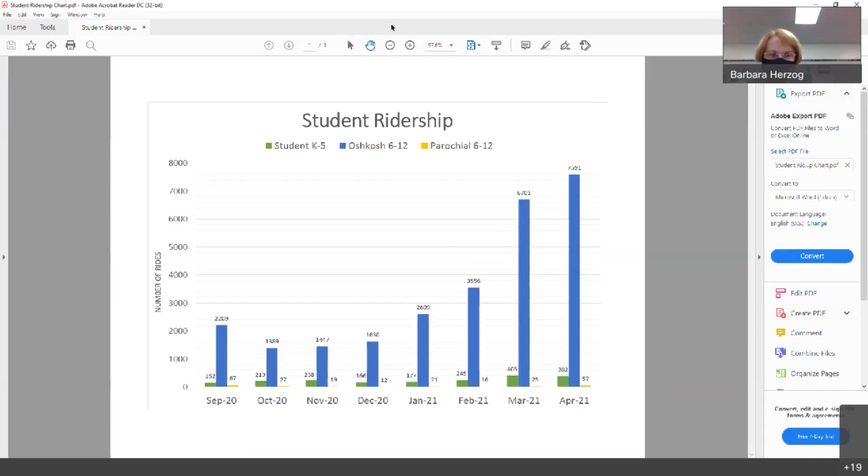I know our board committed to a third year because of the slowness in getting this off the ground. That's something the city had proposed, and because that first year was funded with private donor money, nobody really got their bang for the buck to start out this year. So we're using some of the CARES Act money to fill that gap for the first year and extend it for a third year. It seems like a pretty good compromise, and hopefully in the fall things will be back to normal, and we can see how it goes for the next school year.

Right, and even summer school might be a good assessment. For me, this fits in very nicely with our equity goal for the school district.

Dr. Cartwright and I felt that because this was almost a lost year in terms of taking advantage of this program, going to the third year made much more sense. I've had discussions with representatives at the Boys and Girls Club, and they're very excited about the fact, as Dr. Herzog pointed out, that the youth of our community will be able to access facilities like the Boys and Girls Club, the public library, summer school, anything they want to do. I think we're really going to see, as we get into the next school year, the potential for this program.

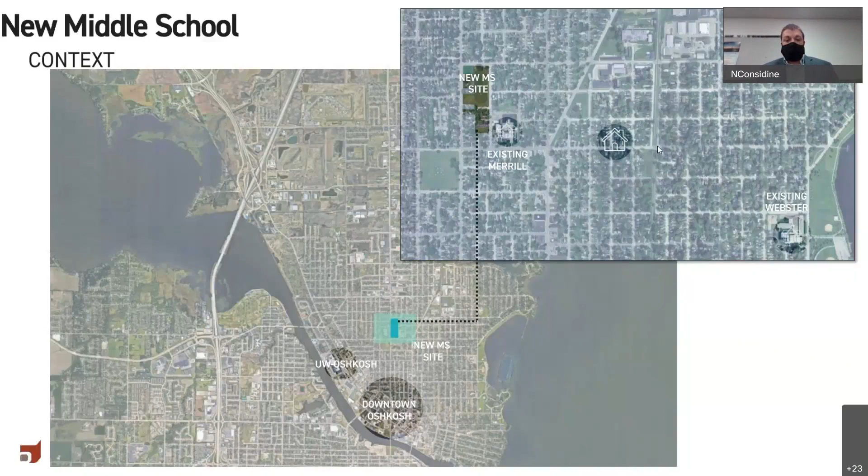We'll zoom in a bit further to our existing site. In the right-hand corner, where you see a couple of soccer fields outlined, is the current Merrill facility location. It's important that we're aware of the community's respect for that building. We talked to a teacher on the second floor about a month ago whose dad actually taught in that same building, not even the same room but the same building. So we're aware of the importance of that facility to this area.

We're cognizant of some challenges but also opportunities with the new site. It's a bit longer, and we have a couple of notches with residents we need to be aware of, whether they're within 30 feet of our building or across the street. Combining two middle schools into one is a big impact not only for the north side but for surrounding neighborhoods, so our building needs to fit in and be appropriate to the surrounding context. We're also cognizant of Jackson Street being adjacent, and the district has had the opportunity to purchase additional parcels to enhance the opportunity for this building.

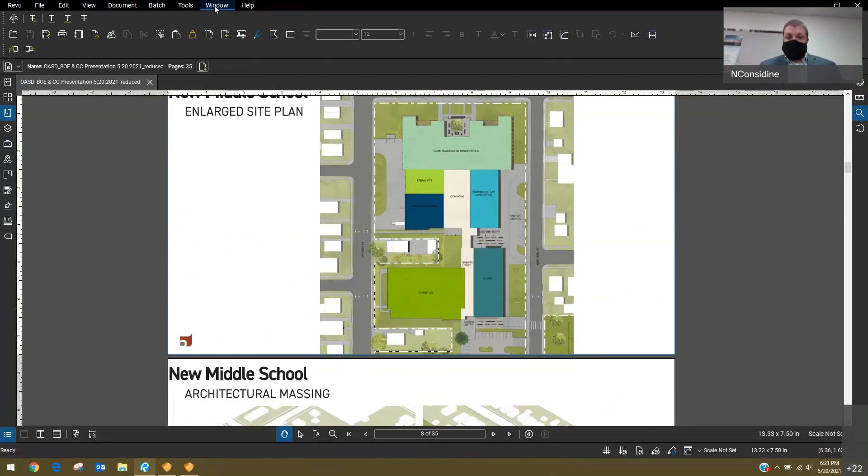Continuing on with the floor plan, you'll see the light blue bar in the middle is the admin and main office portion. The light blue admin portion is obviously adjacent to the secure entry.

Similar to the rest of the referendum, it was very important to make sure that the secure entry would allow for visitor parking, some visitor loop in the front, and making sure that we have a safety and secure entry so that this building can stand for another 100 years.

I'll go down to the bottom right where we're looking at a music option down in this lower corner, and then across from it, athletics. And really spinning everything together, you'll see in this beige area, it connects the secure entry in the middle. There's a common/cafeteria between the main office and the building support piece.

And then as you go to the south, we think that there's an opportunity for a great events lobby. So if you can imagine, you'll see event entry down at the bottom, any after school activities, weekend activities, really more of a public side of the building where we'll show you a 3-station gym, a fitness center, opportunities for music practices on the summers or on the weekends. Really, that entire south portion of the building, although informed shape-wise on the site, really has turned into the public side of the building. So we're very excited about what that offers for this site.

Continuing on, we'll look at an architectural massing. So if we start on the left, Jackson Street is kind of right where the mouse is pointed right there. And so, again, going back to the site context and being appropriate to our neighbors, being appropriate to the streets and the setbacks that we are asked to follow.

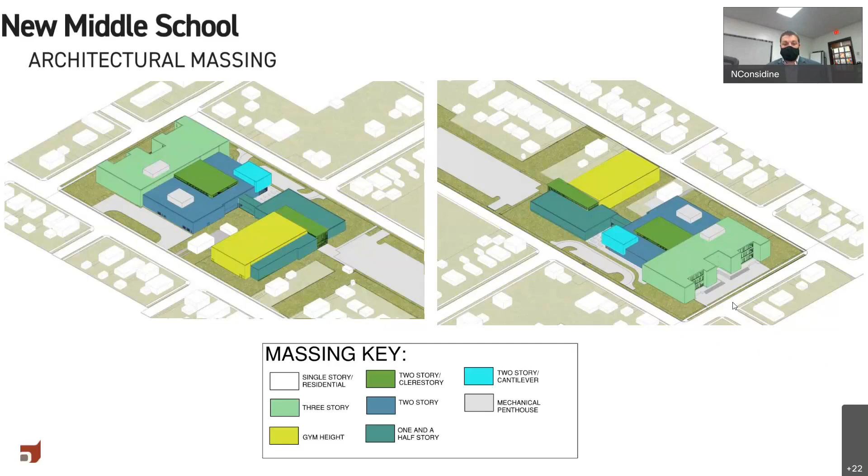On the first floor, again, the top area is mostly just classroom areas and support features for those classrooms.

As we combine two middle schools together, there's been a lot of concerns about how do we keep a big building feeling small. One of the best ways to do that is really creating two pods or two smaller neighborhoods that can be divided by something but yet unite in the middle. If we look on the left side, there's roughly 6 classrooms, and on the opposite side, there's another 6 with science in the middle. Science is kind of the bridge between those classroom areas. Down below, we have bathrooms, teacher prep areas, small group instruction rooms, elevators, things like that.

As we move slightly further down, maybe I'll start on the right side. The light blue area adjacent to the secure entry is the main office and a community room towards the top of the building, or top of that blue bar per se.

In the middle is a commons with a featured staircase that you'll see a little bit later on in the presentation. In this common/cafeteria area, not only is the staircase a feature, but you also start to see this box at the top, and that's a platform or stage of sorts. That could be featured in a lot of different ways, whether there's a jazz band, whether there's a small ensemble doing something, there could be small presentations for staff. There's a lot of opportunities that could be both within the school and also public use for that area.

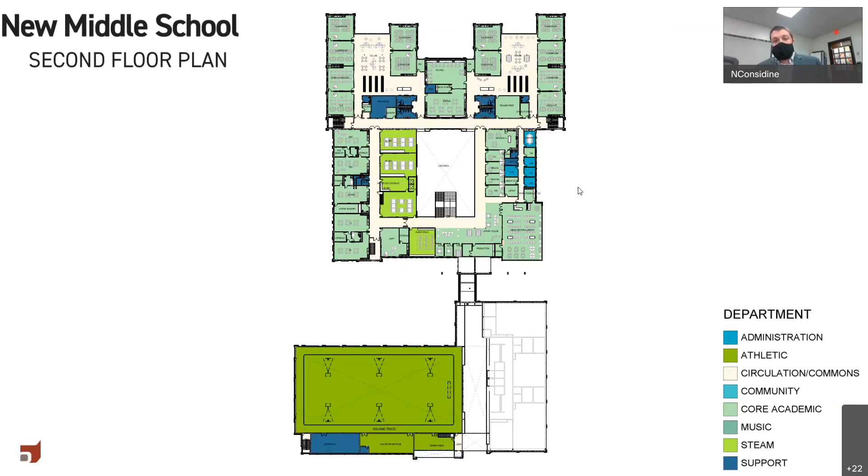We'll slide up to the third floor, which is the 8th grade portion. As you'll see, it is strictly just the classroom area. Most of this building is two stories, with the exception of this one area. We felt it was important to compact this building as much as we can, but also be cognizant of our building height, since our close neighbors and the surrounding community shouldn't feel like this is a giant amongst a bunch of residential area.

I think another really important part of any school we design, but in particular this one coming from historic facilities, is that we are providing varied educational spaces for the students—in some cases spaces they've never had before. These beige areas that connect and serve all of these classrooms will be collaboration zones where kids can have more spontaneous learning, group learning, singular learning—covering the breadth of ways that students learn. You'll see that as we move through the 3D images later in the presentation.

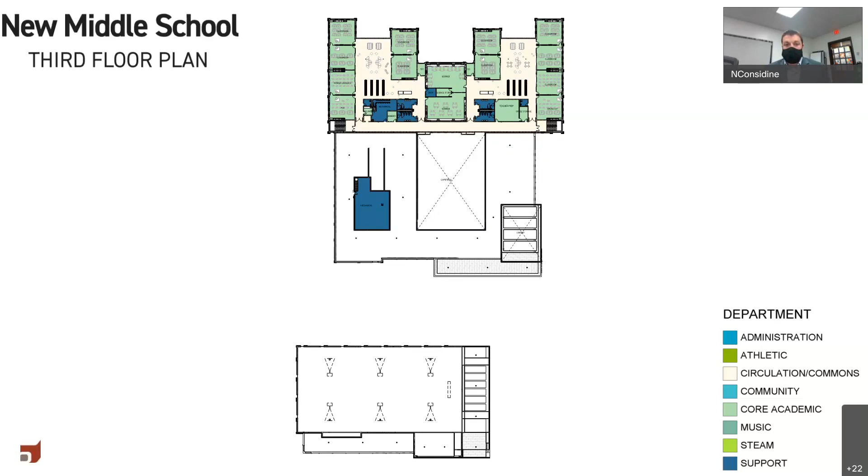Nate did mention briefly this concept of unity, and when we start to think about how to extrapolate a floor plan into actual architecture, we look to find a concept that will guide us through that. Our team is really passionate about designing a school environment that is uniquely tailored to the school population and the school community itself. So unity is kind of an obvious one here—we're unifying the students of Webster, Stanley, and Merrill, but also looking to unify new and old.

We've talked about the historic facilities, and we've talked about pushing towards the future. As Nate mentioned going through the floor plan, it's about the unification of program—really exposing and celebrating all of that program.

Moving into the exterior design portion of our presentation, we know the community is very sensitive to the fact that the historic Merrill School will no longer be in use for the middle schoolers on the north side. We also looked at existing context in the Oshkosh area, both on the north side and the greater area, and there are a lot of historic buildings with very similar architectural elements.

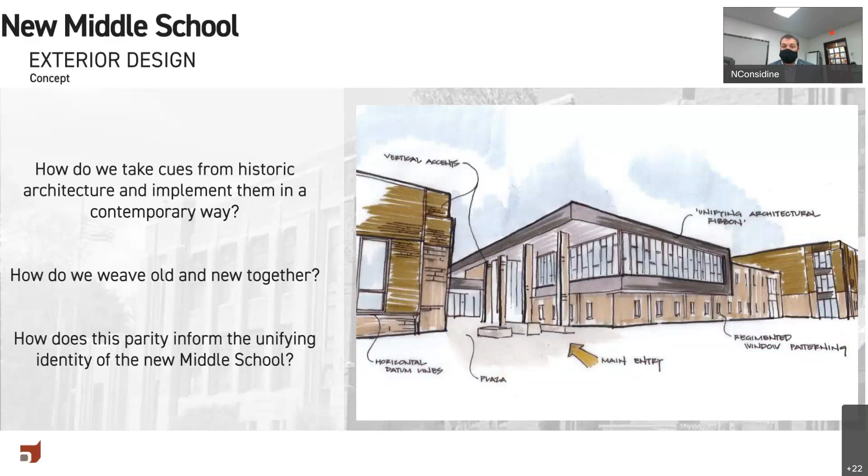As I mentioned, we did an Oshkosh tour and looked at some of the buildings around town, including the historic Merrill site. We started to extrapolate architectural elements indicative of those historical movements and thought about how we could infuse the contemporary building with those elements. This is an abstract study of some of the things we saw: vertical accents, masonry detailing, horizontal datums, and regimented window patterns.

As I said, we're very passionate about creating a unique, curated design—so what architectural elements are uniquely Oshkosh New Middle School, because we don't have a name for it quite yet?

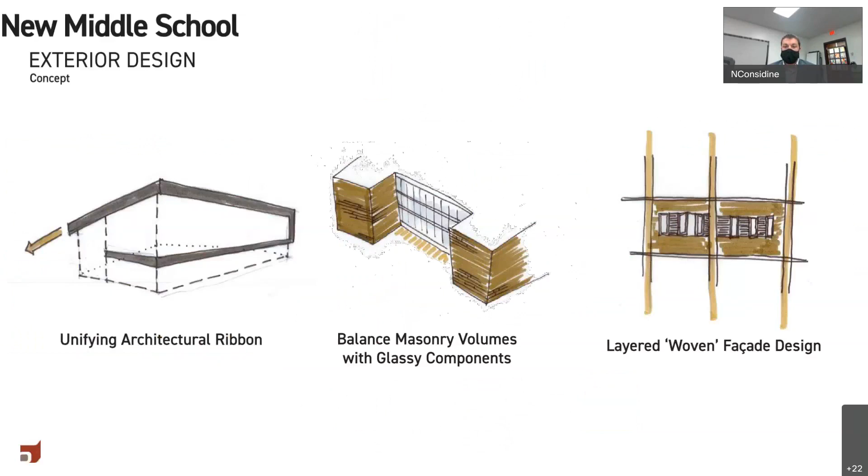From a materiality standpoint, we wanted to be very sensitive to the fact that there is an existing historic facility. In historic facilities, you see a lot of masonry and highly detailed architecture in the detailing, so we wanted to bring that to our building as well. You'll see a reddish brown brick, a flat greige stone, dark bronze metal panels, and accented copper.

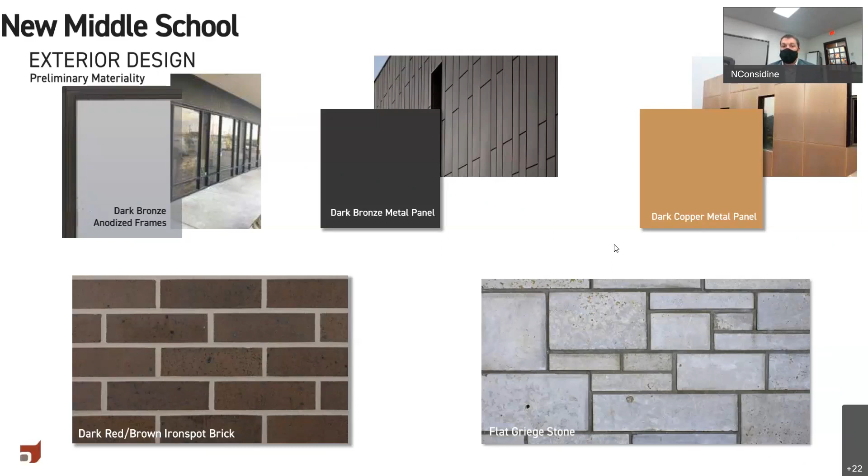So a nod to the historic, but using them in a contemporary way. And I am lucky enough to do the fun part of the presentation, which is to take you on a tour of our facility.

We use this design software that makes you feel like you're playing a video game, where we'll walk this path. The stars indicate some of the final renderings we're going to show prior to kicking off our tour. We're going to start at the secure entry on Kentucky Street, work our way around up to the core academic along the Jackson Street side, look at the gymnasium, and finish at the events entry. I'll show those finished renderings, and then we'll walk around the building.

If you look at the key in the corner, that star will help orient you. Here we are looking towards the secure entry. You can see a vast amount of glass—that's actually the library, anchored by the administration office area and accented by this pedestrian plaza. As we mentioned in our site plan discussion, we have three access points into the building; this is the one for visitors throughout the day who come through that secure entry sequence, identified by similar plaza architecture.

On the left you're seeing the music volume, and just beyond on the right, the core academic. Again, you're seeing that architectural unifying element I mentioned along with some of those sketches, which you'll see in a few other places as we move around the building. You're starting to see some of those historic vertical piers and punched openings in the masonry, and you'll see that again throughout.

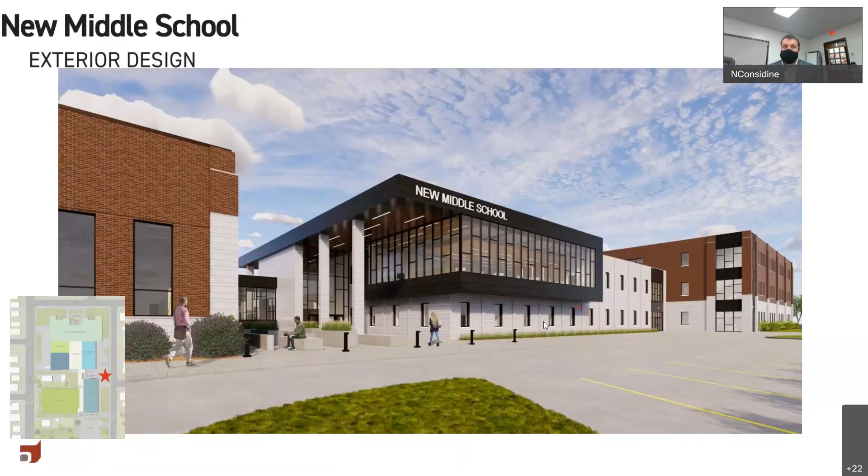We just walked north. We're now looking back towards the core academic space. I want to note that balance between the masonry components and the more contemporary glassy volumes. By pushing the building in and out this way, it creates a more comfortable sense of scale for residents adjacent to this building, whereas if this was one big flat facade, it would be a little intimidating.

The other thing this architecture does is create a sense of place for students. Each bay you'll see as we walk around indicates a classroom. The glassy volumes indicate the collaboration areas I mentioned at the tail end of our plan discussion, and again, a plaza to welcome students as they arrive from the bus on the north side on Nevada Street.

We just were standing down here, walked along the north side of the building, and now we're standing on Jackson looking south. Again, you start to see each bay indicative of a classroom, those vertical piers inspired by historic architecture, and some masonry detailing we're starting to work through, really pulling details from the historic architecture.

We're anticipating quite a bit of landscaping. We fully recognize that Jackson Street is a main thoroughfare through the entire city, and we want this to look nice, something the Oshkosh Area School District can be proud of and want everyone to see as they move through the city. You can see some of our receiving functions screened nicely by the landscaping, also controlled from a safety and security standpoint by this fence.

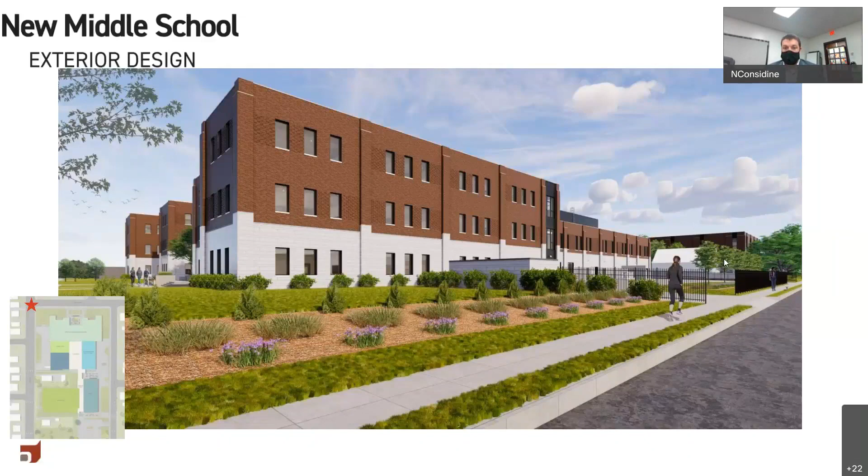This will be our final still rendering that we're going to look at. We're now standing just at the mouth of that parking lot, looking towards the events entry and the fitness center. So again, as I mentioned on the first rendering, you see that unifying architectural element, not only highlighting that entry point into the building, but signifying this is the new Oshkosh Middle School on the north side. And then to the left, that's that stone volume that we were just looking at.

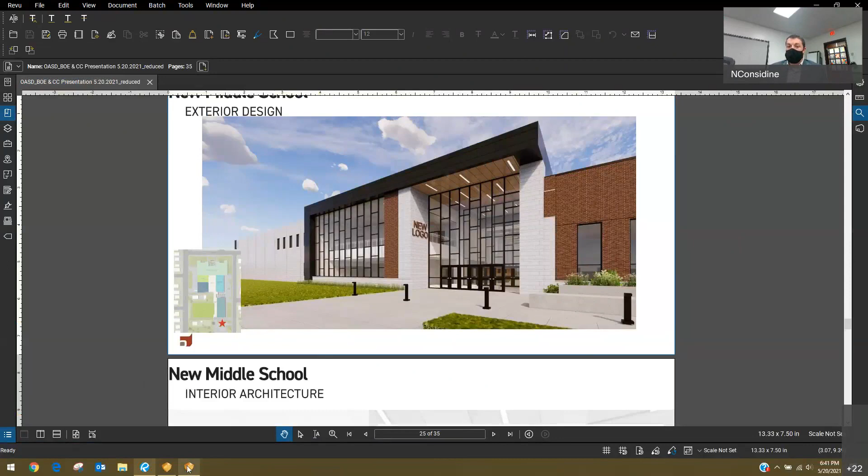So again, balancing those contemporary glassy components with more traditional structured masonry. I think it's important to note that as we did our tour throughout the north side of Oshkosh, some of the materials that Maria already mentioned, but that we're very aware of, is on our historic buildings within the city there's flat cut stone that is typically a beige or a gray of sorts. And then there's a relatively brown or red brick that is commonly used.

We know that the Merrill site will be missed on the north side. I know that there's still conversations about exactly what happens there, but we feel that by introducing the materials that are common, we try to bring a merge of the historic feel versus the contemporary. And this is hopefully something that can be very exciting for the north side, exciting for Oshkosh Area School District, and exciting for the city of Oshkosh.

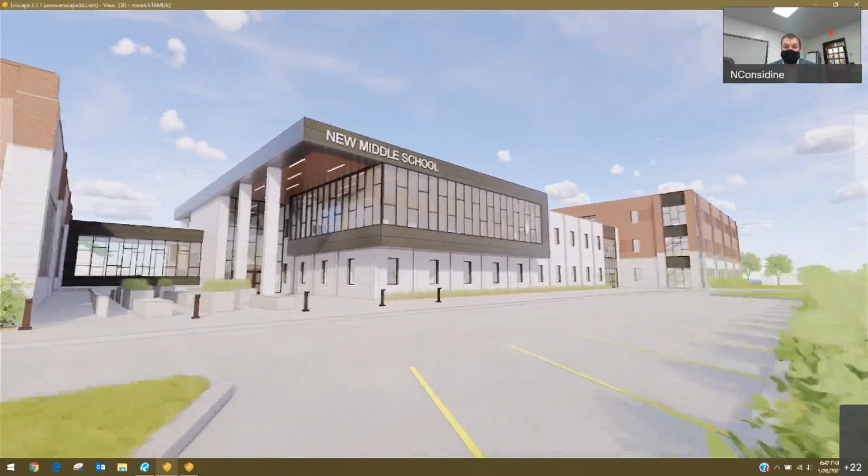So as I promised, we're going to take you around the building. We're going to go that same route that we just took. But the software, as you can see, really just gives you a better sense of how the architecture starts to feel.

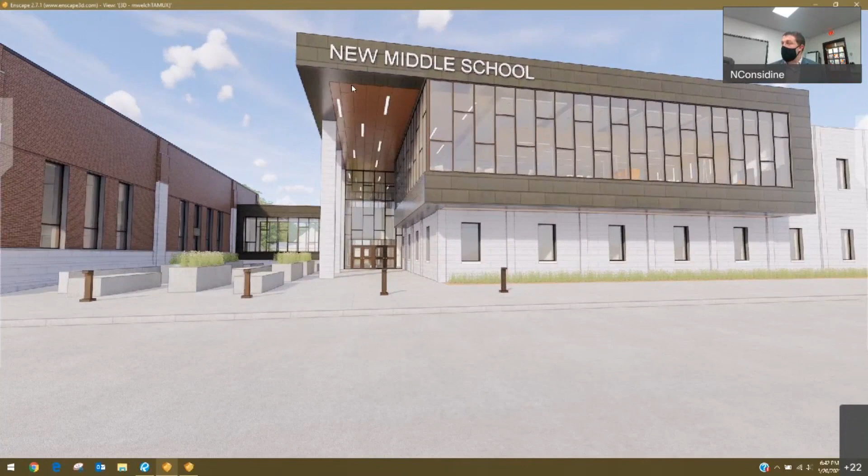One thing to note is we talked about the copper metal panel, and you didn't see a lot of it, right? Because if we put copper on this entire thing, it will just shine and kind of look like an eyesore of sorts. So we picked very pointed portions of the building to introduce that, to be a balance of the dark metal panel, and really accent some unique areas on the building.

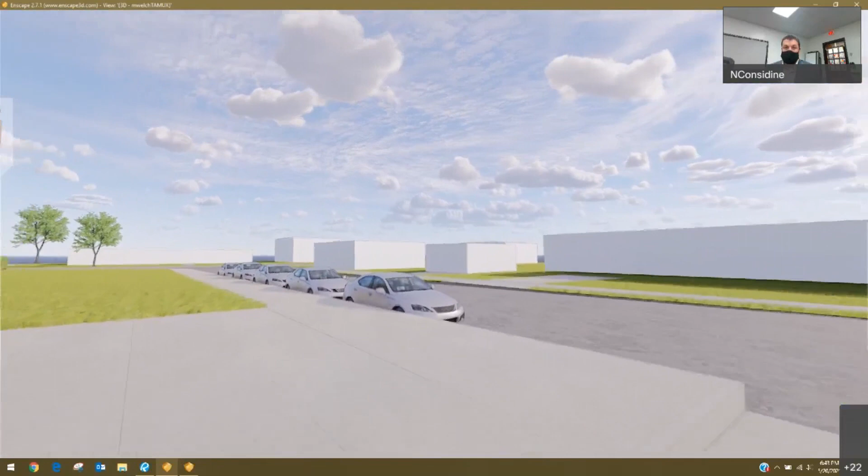Something else that was important to note, and we've mentioned it a few times, but you can see it in this model as well, is that we actually took the time to fully model a block out from our new facility so that we could really start to get a sense for how the scale of the existing neighborhood will fit with the new building. So that's what you're seeing in all of these white boxes. Those are representative of the single family residences around.

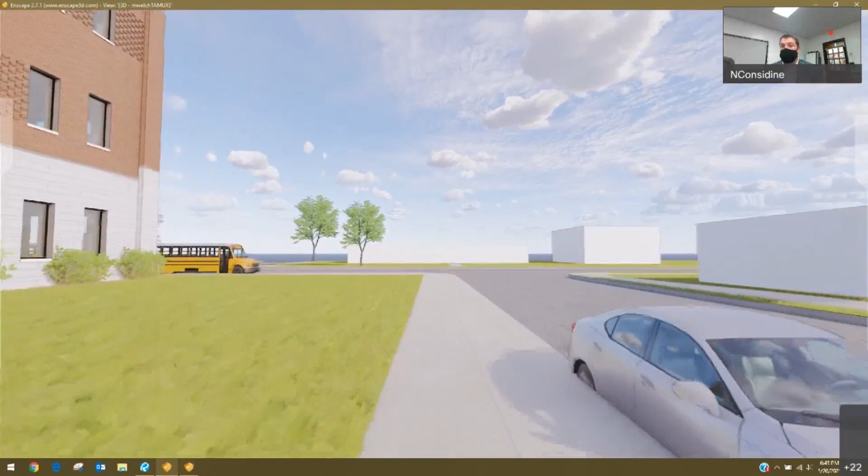It was interesting. We were a little bit nervous when we first saw this site because I said, wow, we're really in the depth of a residential neighborhood. And I was worried about a single story home. But fortunately, this site is surrounded by many, many two-story homes. And so that really helps, I feel, with the scale of the building. I'd be a lot more concerned if we were surrounded by ranches. But the fact that we have two-story homes around this area is a benefit to this site.

As Maria is kind of spinning back, you'll see the brick detailing and kind of the weaving that we talked about earlier in between the windows. And again, the vertical emphasis. That was another thing that we saw on our tour. You drive through downtown Oshkosh, you drive through UWO, even a little bit further north - there's a lot of vertical emphasis on even 3 or 4 story buildings. It really helps break up the view or just the scale of the building.

So then you can start to see how the buses would begin to queue on the north side. As kids would enter the school for the day, they would be welcomed by this plaza, as I mentioned. As I spin around here, again, to help orient you in relation to the plan, this is sort of one half of the neighborhood or the core academic class. This is the other half, and then this is actually the facade for the science classroom, kind of the bridge between those two.

Really looking to engage the site fully. So looking for a lot of landscaping again to really soften that, as well as help with safety and security.

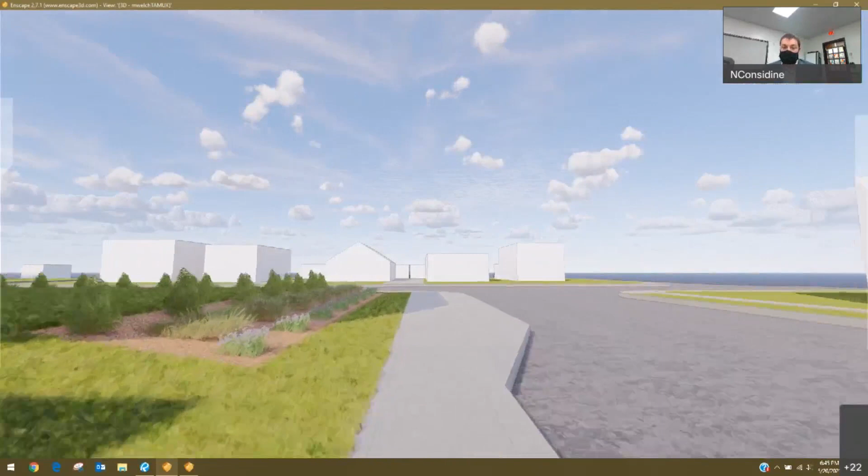And to further our conversation earlier, we talked in great depth with the core planning team regarding which way this building faces. And the security was a big piece of this. Any sort of student traffic on Jackson Street was very worrisome for the district. So having to deal with bus drop-off, parent drop-off, and realizing, specific to Merrill, and it'll be interesting to see how the Webster students transition - but we were told somewhere in the neighborhood of 60% of the Merrill students walk or ride their bikes or take local public transit to the school.

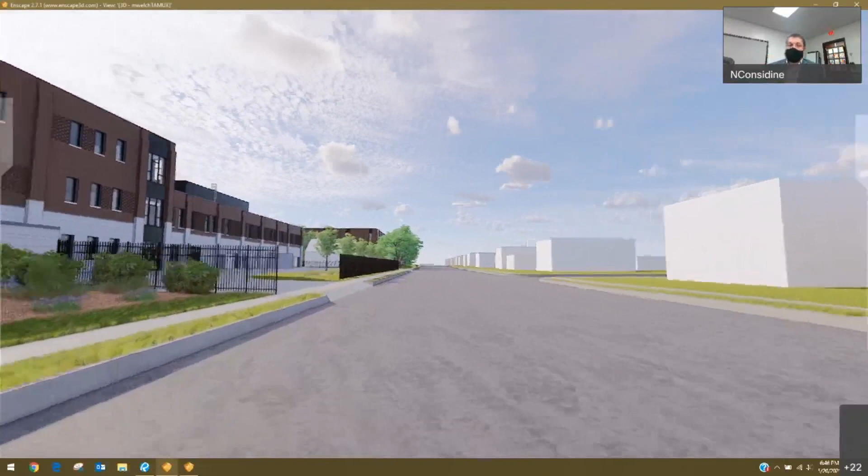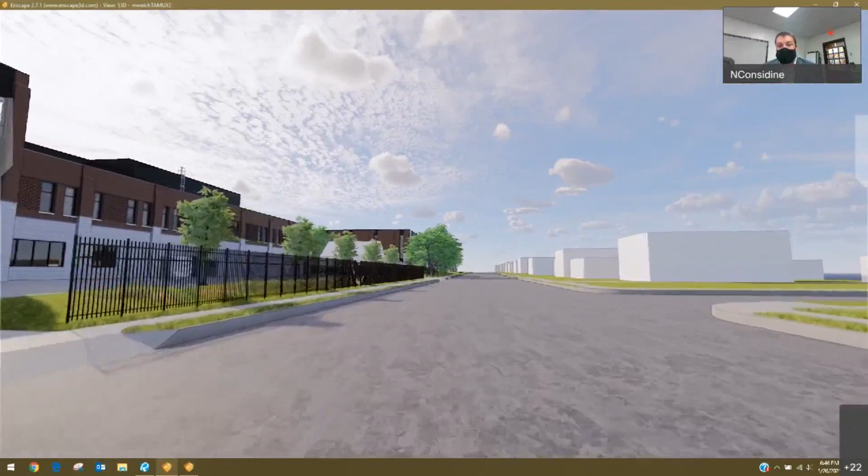This fence area, we're not showing a gate, but some of the early conversations with the city are that we're worried about the traffic in and off of Jackson Street. Having a fence here to deter, but also having gates that would be on timers. This area is really for deliveries. And by no means is this the back of the building. This is what we call the Jackson Street side of the building.

Knowing how important traffic safety is, fencing off not only helps our neighbors but also limits traffic. Allowing parents to be able to pull on this side and drop their kids off is not something the school district is interested in, and I don't think the city is interested in either. So as we go through the traffic study, more of that information will become available to us.

But know that this area, we're planning to have a fence and a gate to really help with the access here.

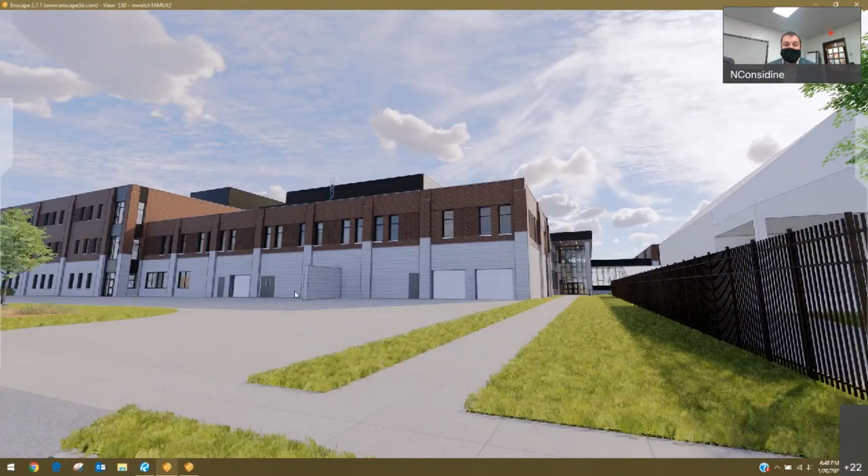It is nice on this side of the building, as Maria pans over, just how easy it is for deliveries. If we tried to take deliveries off a different portion, it would be very challenging for a large truck. Another side of it is that we're able to pair it with the tech ed side of things, and we anticipate deliveries of things like wood. So keeping that together in one delivery area is also a benefit to this site.

Something we might want to— can I ask a quick question on that?

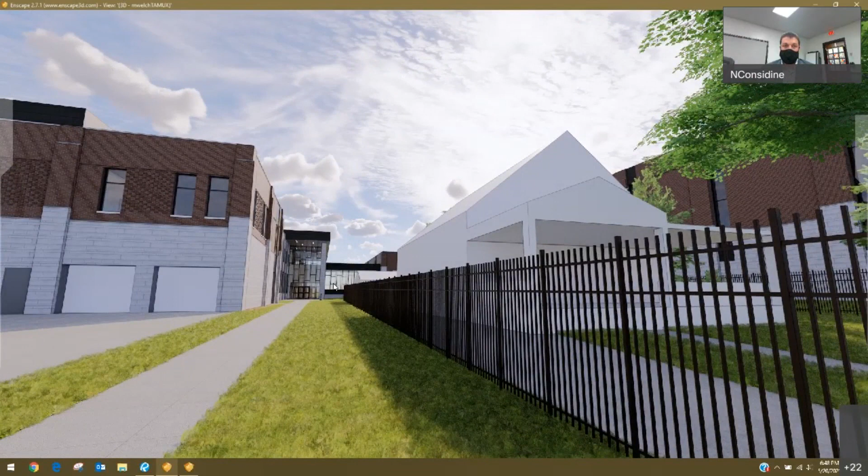As well, and we've mentioned it a little bit previously, the future goal on the school district side is that this property would be purchased at some point, which would allow this plot to be turned into student green space, potentially a playground area. So as we look at this elevation, I'd urge everyone to keep that in mind.

Knowing this will serve as a plaza pedestrian entry point potentially in the future, our design team decided to carry that architectural ribbon and glassy component to this elevation on the Jackson Street side. What that's really doing—we started on the other side of the building, that is the main entrance. If you go straight through those doors, the main entrance is directly through there. So that is really a volume where there could be entrance off the east side or the west side.

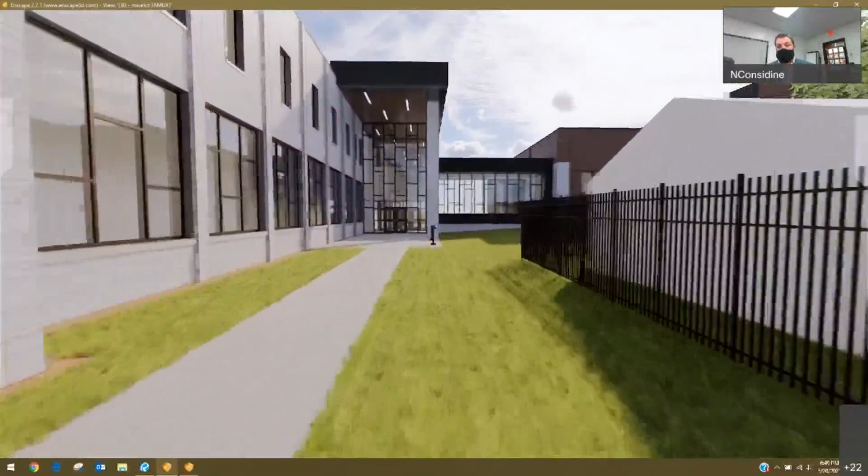That's strictly just a pass-through. And although we are talking about the Kentucky side as our visitor entrance, this could very well be student access. Go ahead, Dave. Oh, I'm sorry.

So was there a question from one of the council members? Yeah, if you don't mind—just because you're on Jackson Street, and I know we're going to come back to this, but I appreciate trying to keep the traffic off of Jackson. But anybody who knows Oshkosh, the idea of a semi backing up on Jackson Street into that loading dock is a farce. That's going to be fun to watch.

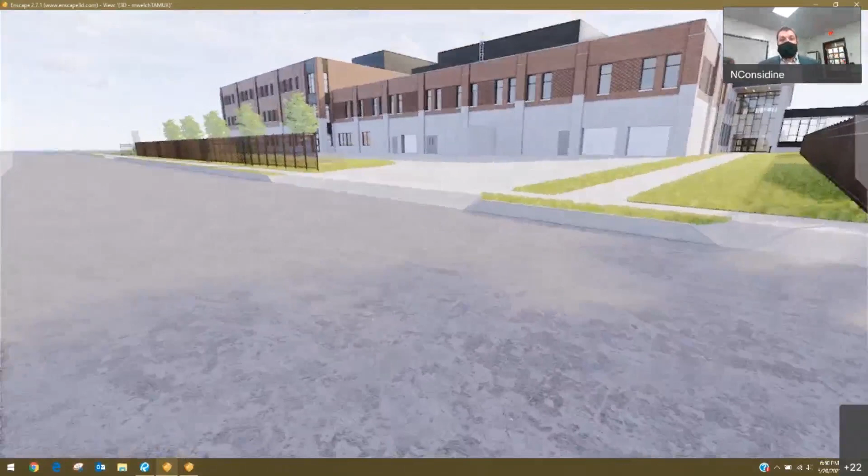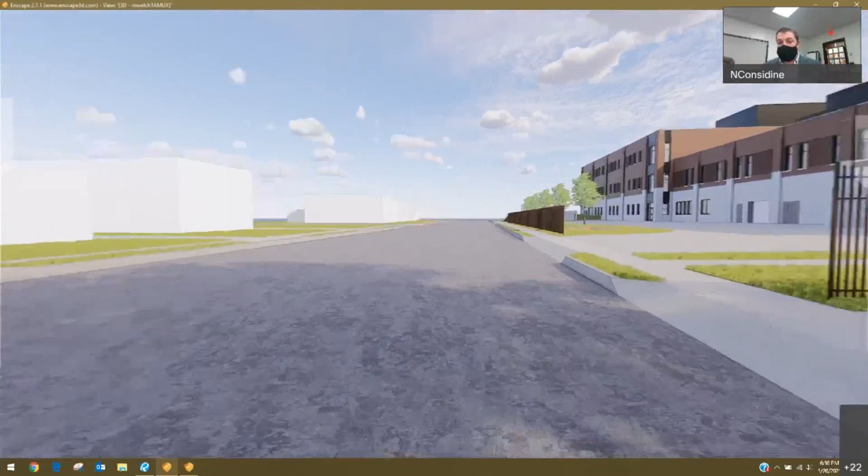So the way that area is designed, they would actually not be backing up into it. They would be able to drive directly in, and there's enough space between the fence and the building for them to maneuver and turn around in there. We do not want any sort of backing off of Jackson into this site. We understand the complications with the site in general, and we had to be very thoughtful about that. So, yes, to echo you, no one wants to see any backing into this area.

It would be what I described to members of the planning department: this would be a 5-minute in and out, hopefully, instead of, let's say, a 30-minute catastrophe at 8 a.m. and a 30-minute catastrophe at 3:15 p.m. So that was very purposeful, and we're hoping the traffic study and the planning department agree.

So going back to the orientation, with Jackson being a corridor and gateway arterial road, this elevation seems to essentially turn its back on a main arterial. I'm just trying to understand the decision for putting service bays and utilitarian things facing outward. Can somebody help me understand that a little more?

Yeah, I mean, really, that was charged by the fact of student safety and really keeping students, for the most part, away from Jackson Street. So to the core planning team and to the design team, it was very much thought that we don't want the main entrance and student entrances on Jackson Street. That was very intentional by the school district.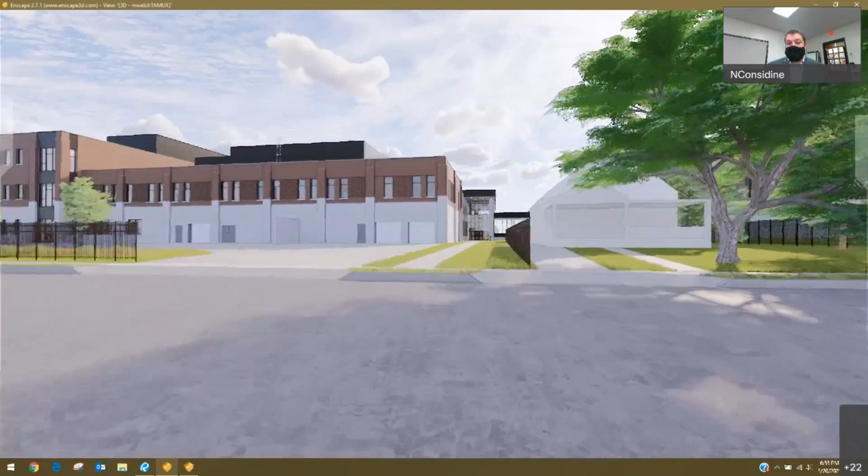And so by no means, let me back up a second. With all intention, this was designed to not be the back of the building. And I would say, if that house wasn't there, then maybe we'd have a different solution. But for the most part, we still have that very frontal entrance once that house goes away, in that glassy entrance for students right there.

I just wonder if you're responding to the fence. I wonder if you're responding to some of the other items and missing some of the detail that's really given to the Jackson Street side.

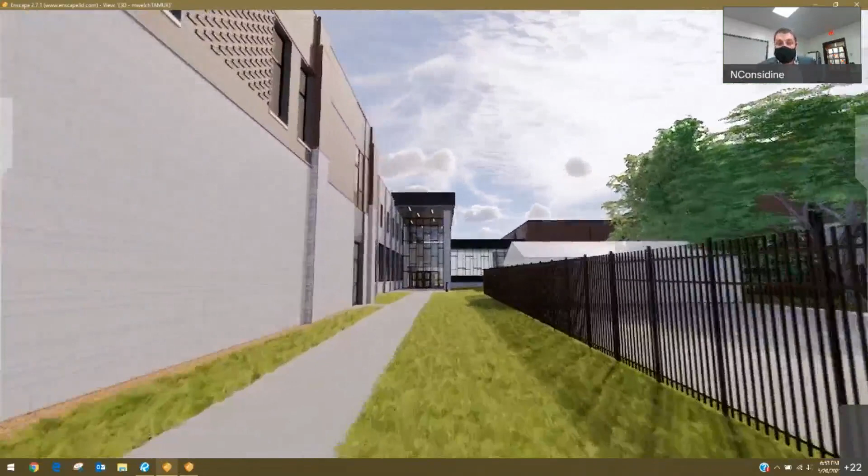Yeah, it was just, I think it was the service bays and the fence and the very utilitarian, imagining mechanicals, dumpsters, those kind of things. I guess maybe it was just a reaction.

Madam Mayor, if I might, your concerns have been noted, and staff has given those comments in the preliminary. So I think the architects understand that the traffic issues that Deputy Mayor Mugrauer brought up are certainly a concern. You're aware of all the traffic work that we're doing on Jackson Street, and we've got to accommodate that. Their challenges, they do have three sides, and I sympathize and welcome that at the same time.

It's a challenge, but it'll be a huge improvement to the neighborhood. But we've got to do everything you just said and get that addressed, and that'll be part of the plan. Eventually, the Plan Commission will be looking at this, and the purpose of this wasn't to get to the Plan Commission level yet. Staff has asked for the traffic study, and they're in the process of hiring a traffic engineer firm to do that work so that we can review that.

Yeah, and I think just to reiterate, this is not the finished final documentation either. We fully acknowledge that we are going to be working with the city and the Plan Commission in order to make sure that this solution is right for everyone.

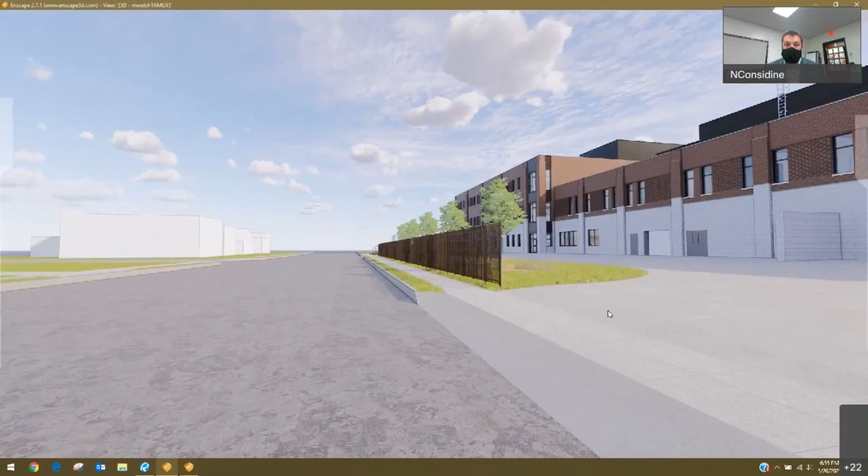Right now, as engineers do, and I can say this because ours isn't here, but our civil engineer was just making sure that he was being sort of the most conservative, and we'll push him, as we always do, as we continue to work with you all at the city to make sure, again, that this is a solution.

But I do want to just reiterate that there won't be any sort of backing into the building or into the site from Jackson Street. Whether the solution looks exactly like this or whether it morphs, which it most likely will, a truck, whatever size, will come in, pull forward, and then back in.

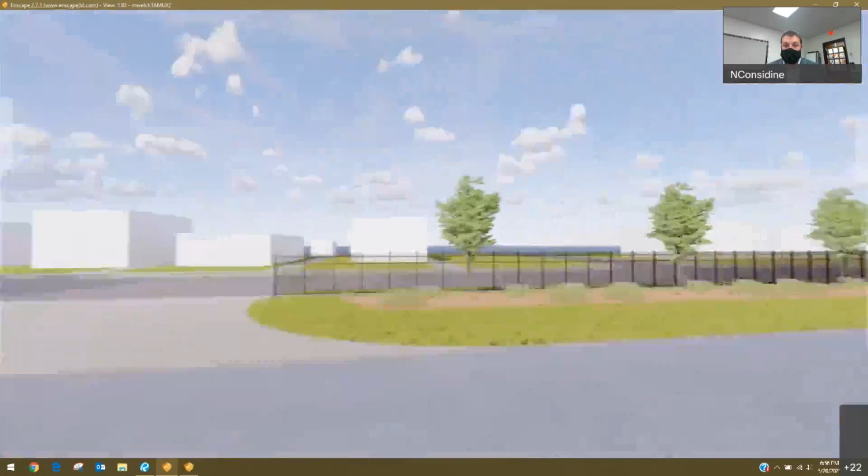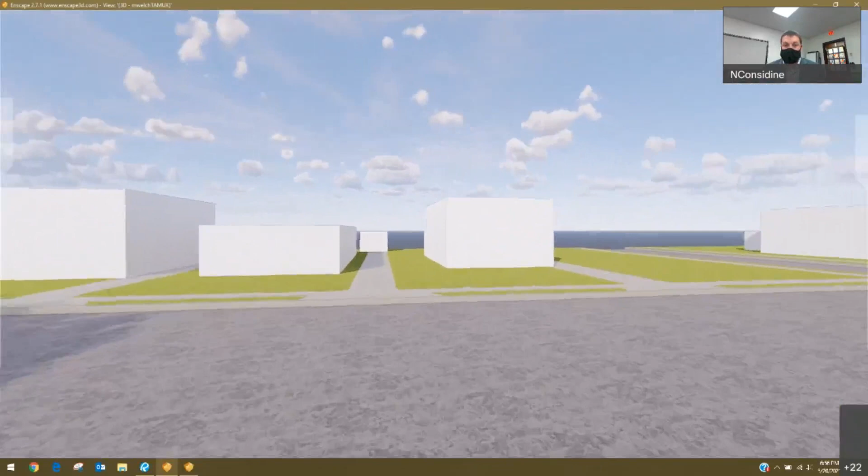And again, we recognize that our site plan, when you look at it and you see all that pavement on the site plan, you're like, oh my gosh, what the heck are they doing? But as I said, we are going to continue to work through this.

We're going to continue to push and make sure that it is satisfying all of those requirements. And from the architectural side of things, I'll echo what Nate said in that we put just as much architectural design effort into the Jackson Street side, if not more, knowing that this was a main thoroughfare, to make sure that this does look the way that it does.

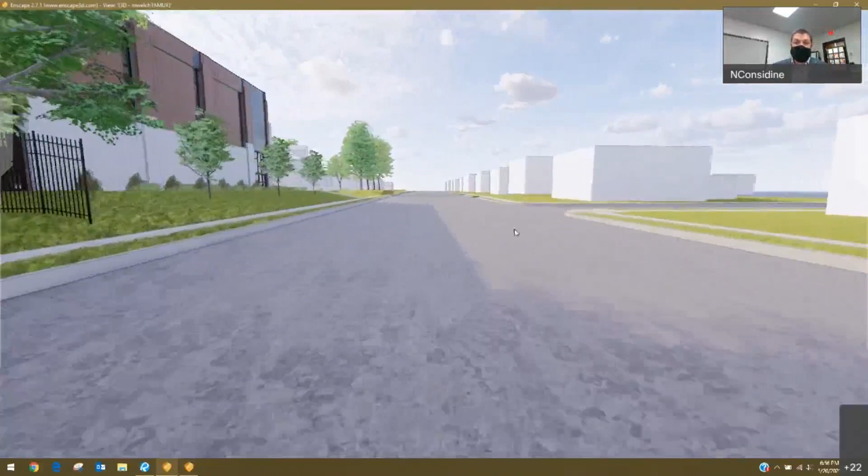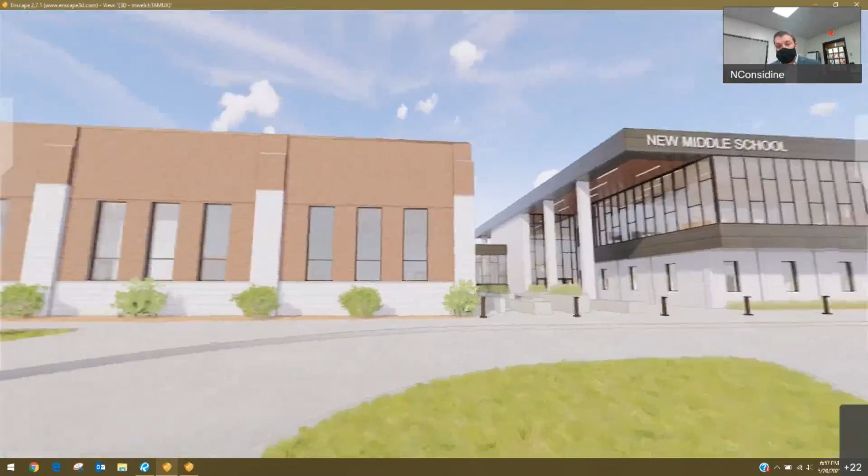I think your instant reaction might be, wow, Kentucky Street gets this big, glassy, beautiful facade, right? And Jackson Street has a bunch of punched openings and a couple of overhead doors. As we continue to lay out and figure out the best function and layout of how this building operates, I would love to build a building that made sense for students where there's glass on every facade, but we're not building business towers. We're building schools for students to really engage in, and we want to make sure that we're being appropriate not only to our context, but to the learning environments as well.

So Maria, do you want to jump back over to the Jackson Street gym view, and then we can finish on the south side? I guess we didn't get all the way over there, did we?

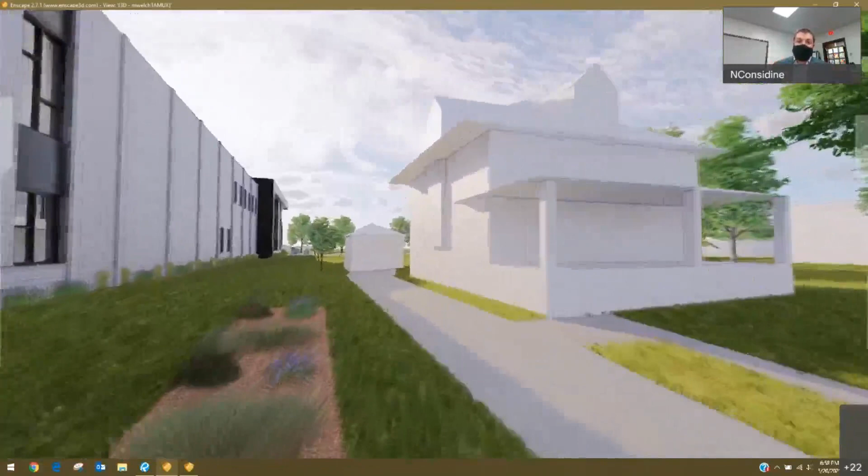We realize that landscaping is going to be a large piece of this, and adjacency to our neighbors is another piece as well. We're very aware of our proximity to our neighbors, and one thing we'll be in dialogue with them about very shortly is, if they plan to stay there, which they intend to do, how do we protect your property? How do we prevent students from going in, playing basketball in their garage, kicking their trash cans, whatever it is that students are doing these days. Those are conversations we are having with those neighbors.

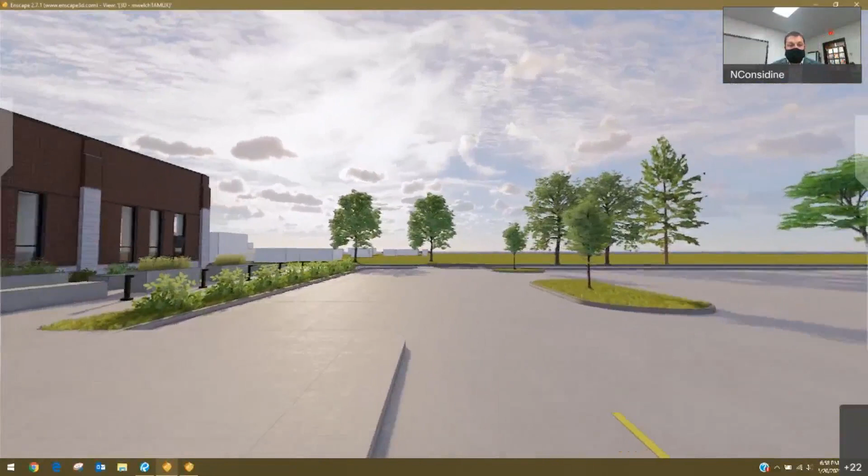And site access as well. We're certainly hoping that people aren't doing what I'm doing right now, cutting through the site this way. It just happens to be the most efficient way to get over here. But we're going to continue to work with our civil engineer, work with the school district, and work with the city to make sure that we have access where we want it, that we restrict access where we don't, and that we have visual interest where we want it, and all of those sorts of things.

So just wanted to finish up our tour on this south elevation. We're standing at the tippy top of the visitor staff parking lot. This would be where grandparents would come for Johnny's basketball game at night. They would come through these doors and enter into the gym, again using that same architectural language, and to our earlier point, balancing the contemporary glassy components with the masonry.

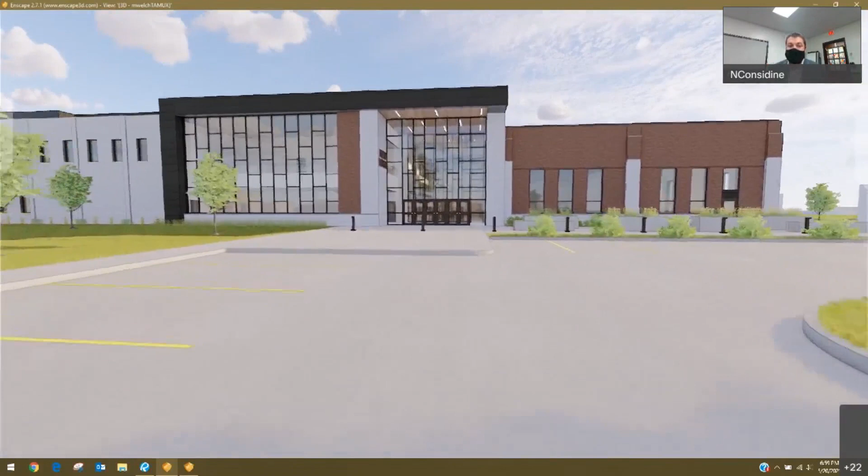One other thing to note is the large swath of glass just left of the doors. That is the very community-focused, and also school-focused, community fitness center. The idea is that someone from the community could enter those doors, and there's a door directly to your left and an elevator directly to your left to access that fitness room, which can be utilized both by the school district and their students as well as the community.

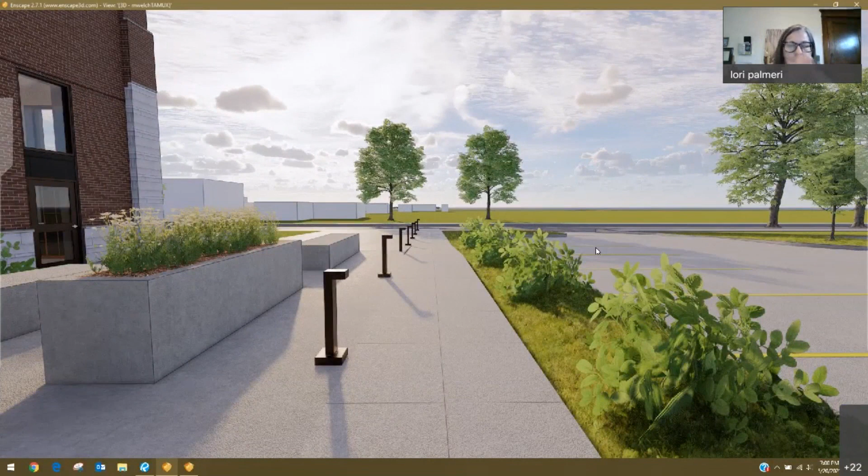If I could just ask a question about the discussion of restricting access and community access. I've been hearing from some folks who are interested in knowing, is this inviting community in after or outside of school hours? Or is it restricting students or others from using the space when school is not in session? I'm sorry, I know that's a more operational question, but I'm just getting a little confused on that.

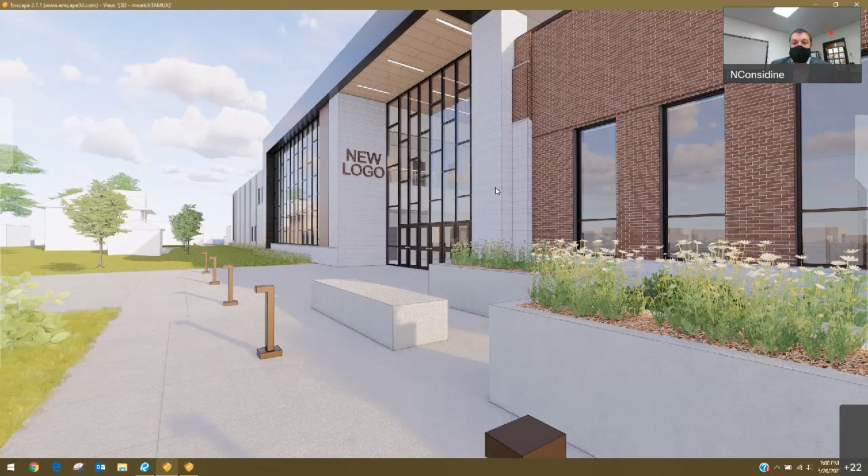Some of the early conversations have been that this would be accessible for community members before school and largely after school and on weekends. That doesn't mean that, depending on how the facility is used throughout the first couple of years, there couldn't be opportunities afforded to the public on different days or hours. But the preliminary idea is that this is available from 5 a.m. to 7 a.m. and from 4 p.m. until 10 p.m. or something like that. It would be along the lines of our recreation department, having some of those opportunities to make this a community hub for the neighborhood. We don't have anything specific planned, but the key thing you're going to see in the design, both interior and exterior, is flexibility.

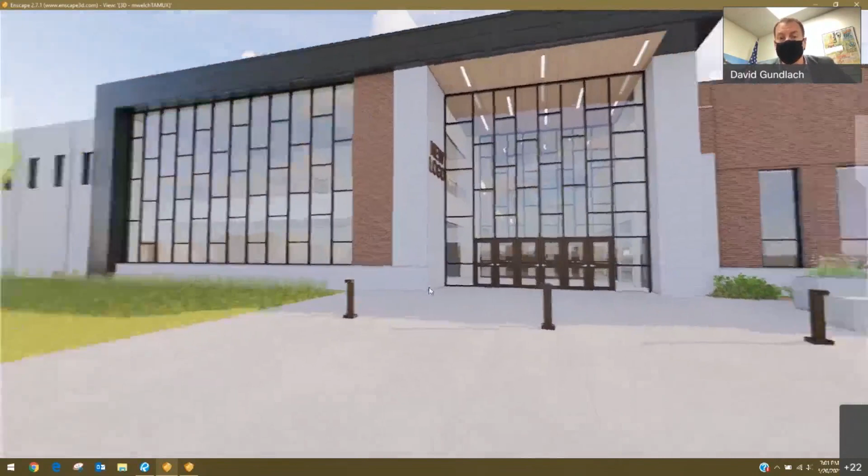We built this for 100 years, so how do we make sure that it meets the needs of our community, not only now, but down the road, especially in a community like ours that has such a well-running and well-developed recreation department. This gives one more opportunity for our community to come into the buildings, because they fund these buildings. They should be able to use these buildings to the extent they can, and to the extent that it does not interfere with instruction.

This is something we've been working with other school districts on as well, sort of the access to these community fitness rooms. We'd be happy to reach out to those districts and see how that's going for them and how that's working, if we'd like to. More likely high schools are doing this, but also middle schools as well.

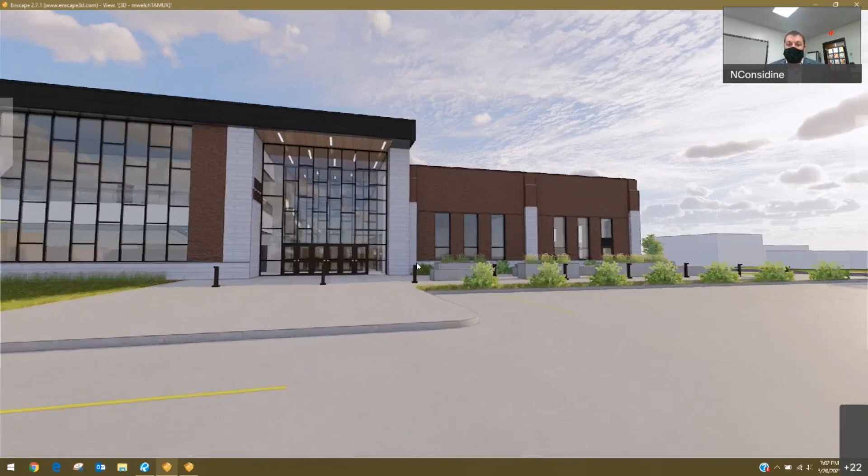We just knew that when the referendum passed, there were many portions of this facility, and eventually the new elementary school, that really need to be community focused, that the north side could very much benefit from. That was an emphasis by the school district to start, and we want to make sure we are honoring that request. And if I could just ask another question too, I know there was some reference in the early layout showing soccer fields.

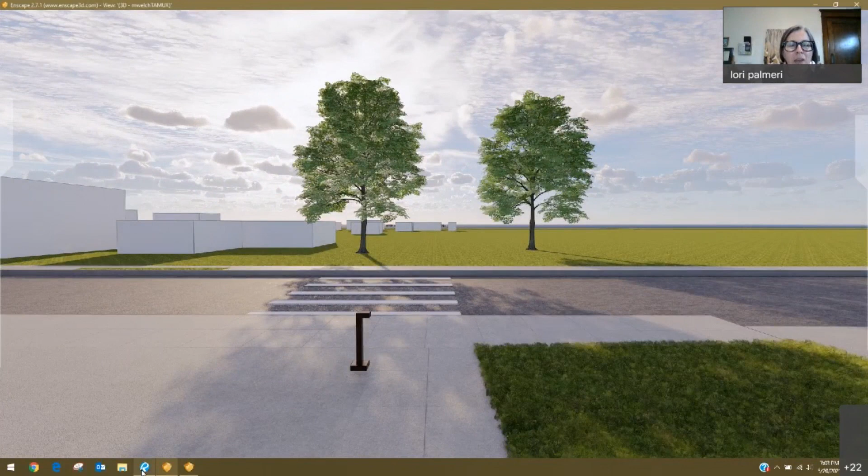Did I miss it, or are you guys looking at any kind of external basketball courts? The reason I ask is if you drive, say, 4 blocks in either direction of this, you'll see a number of portable basketball hoops out on the streets, because the residential lots are so small and there's not really that option. I was just curious, was there an external basketball court planned?

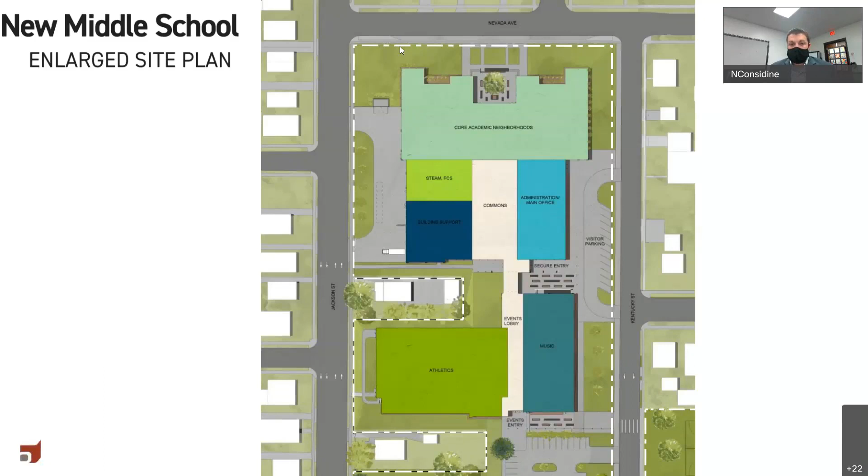We're pulling up the site plan right now. The discussions regarding that site are still very early. Soccer fields are simply just a placeholder of sorts. We are trying to determine what is best for access and playground for the middle school students, and what the north side really needs. So hearing that basketball courts is something that's needed, we will take that information back and continue to digest it at the core planning team level, and also discuss it with the city planning department.

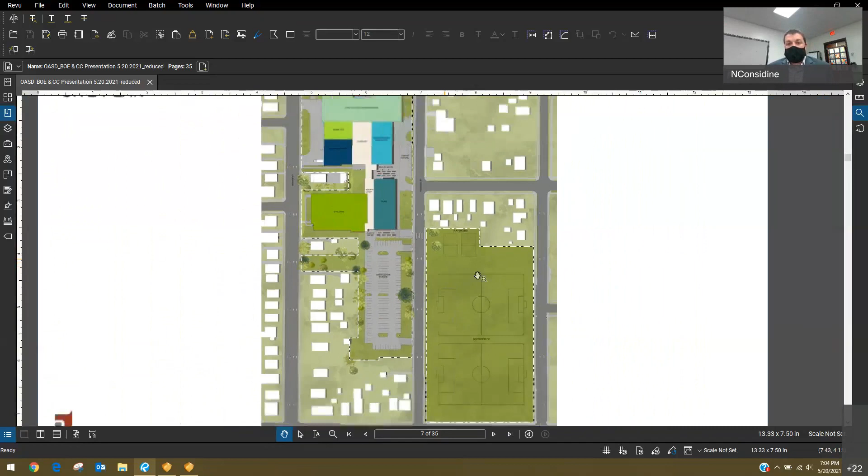I know one of the things the Webster Stanley folks specifically tried to fundraise for a few years ago, and came up a touch short, was a playground specific for the variety that exists within the student population. So getting a playground that is accessible for all is going to be important here. But to your point, this area is still undeveloped. I think there's been conversations specifically about the Merrill building.

What is the future for that building? I think the members of the core planning team feel that this is best served as a green space, but we understand the sensitivity about losing Merrill. So as that conversation develops, we'll be in contact and get you up to speed on some of those things. But the soccer fields were more or less a placeholder.

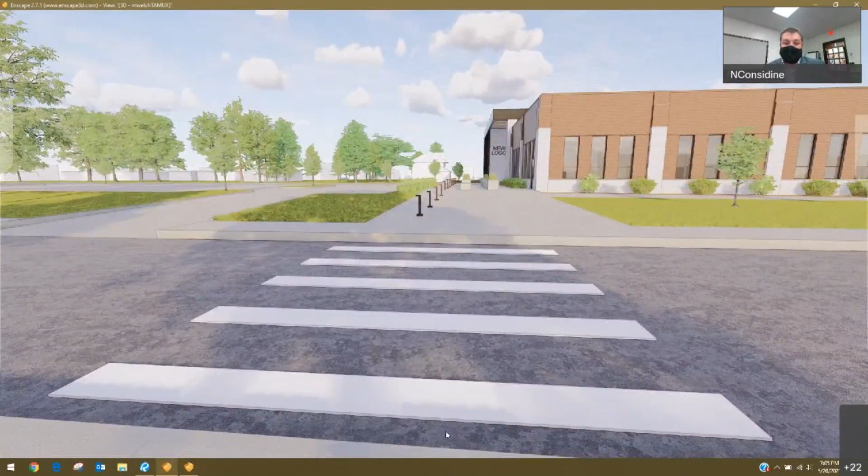And I think, to Nate's comment, we are still kind of figuring out what's going to be the most appropriate solution for that greenfield site across the way, for students and kids within the community and otherwise. But I do want to note that even though it's still very preliminary, we are starting to think about ways, from a site design standpoint, to get kids safely across the street—thinking about crosswalks, bollards, paved paths, and what we can do visually and architecturally to make that crossing as safe as it possibly can be.

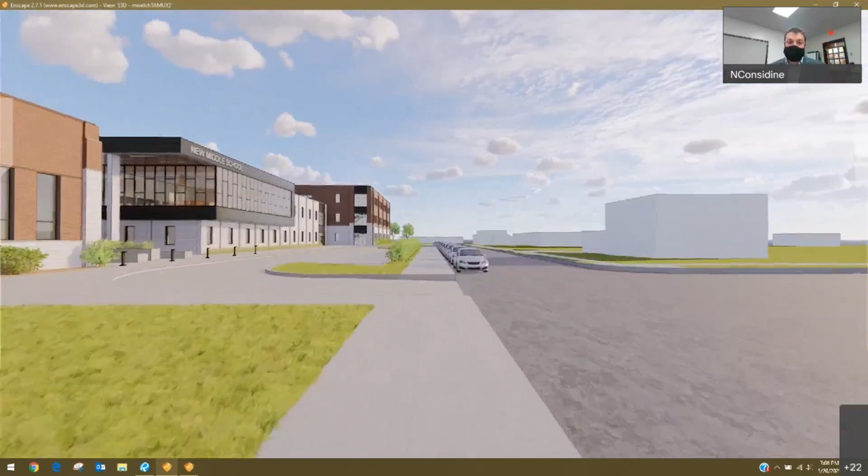So wrapping up, full circle here, you'll see this area Maria is pointing at is the music volume—taller windows, taller space. Music spaces are naturally taller to help with the acoustics and help students learn in that type of environment. There was talk at one point about an auditorium. We're not building an auditorium, but the location of this space would allow for future growth with a variety of different curriculum options, with music being in its location. So again, no auditorium at this site, but its location leaves room for future growth at this facility, if that were to be pursued.

So that wraps up the exterior. Any other questions as we walked around the building?

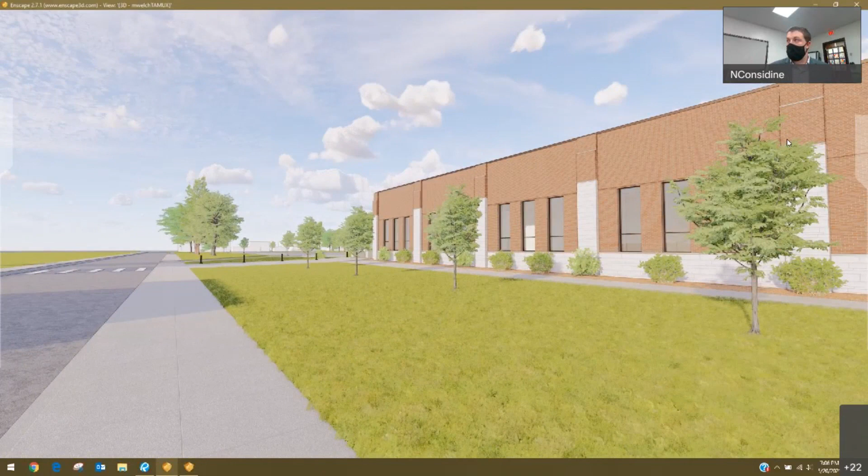If I could add one thing, the last time we saw this presentation, we recommended they look into utilizing that stage in the commons area potentially for different types of auditorium activities. So we are looking into that as well. That was the perfect transition, thank you. And we have started looking at that as well, so we will have that ready for future presentations.

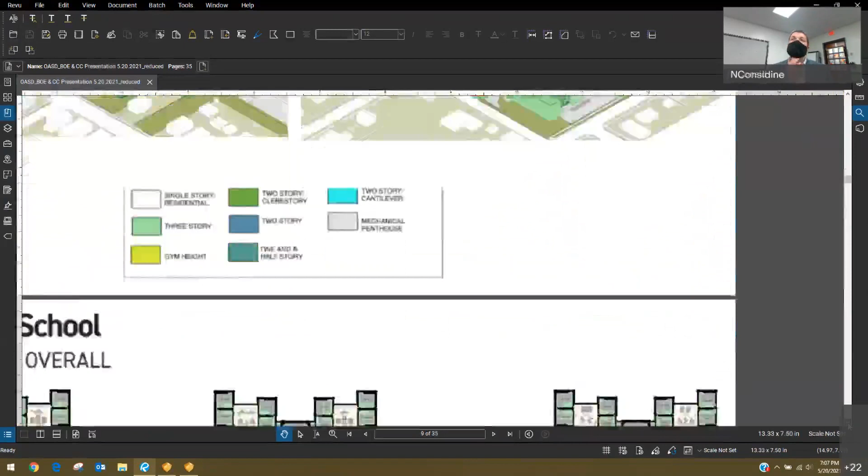And if I could just add one thing, we're also looking at potentially expanding the Hooper Auditorium at North as a stage for the arts. That's very preliminary.

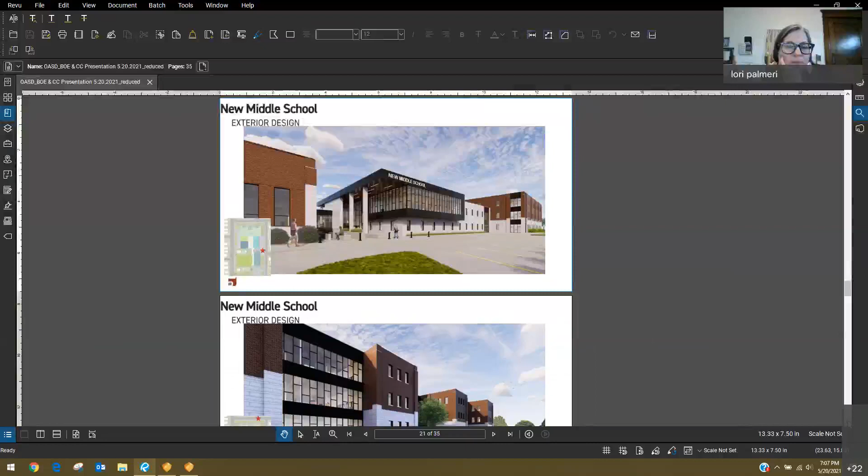I'm sorry, Barb, I couldn't quite make out what you were saying there. Could you repeat that, please? I guess I can kind of chime in for Barb if she's having some technical difficulties. Can you guys hear me? Yes? Okay, thank you, yes.

So at the last board meeting, we were provided this slide deck as well as another slide deck related to what we're referring to as performing facilities, and creating a long range plan and a short range plan on that. It also involves athletic facilities, as well as the performing arts, fine arts and such. The discussion emanated from the loss of the auditorium space at Webster Stanley Middle, and what we can do to expand that, either at Merrill.

We've kind of felt that expanding that at Merrill wasn't going to work on the new site, so it led on to a different discussion about where we could do that on the north side. Right now that discussion is preliminarily happening around the expansion of the Hooper Auditorium, updating it and expanding it sometime in the future.

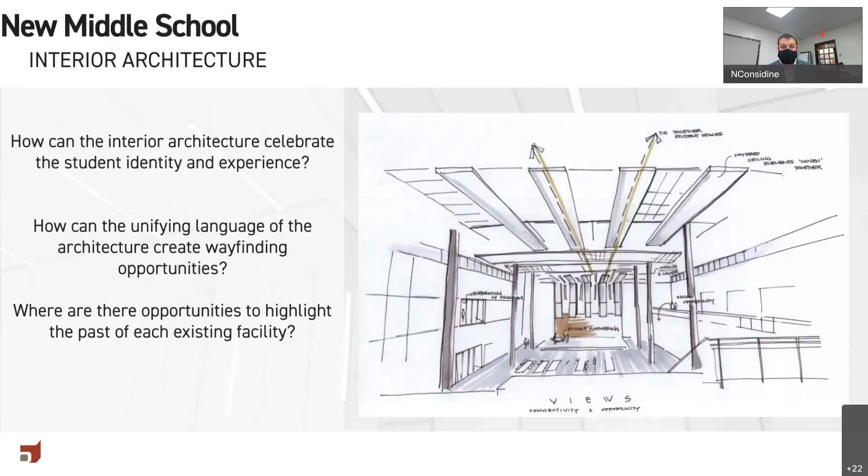So again, just briefly wanted to touch on that idea of unity and how that's weaving its way into the interior architecture of the building, creating a sense of place for each academic neighborhood. The abstracted idea of weaving, stitching, interlocking, repeating, nesting, and aligning—that's what unity looks like to us—and using that as an identifier for each grade, identifying where we want to use those different architectural languages in a purposeful way.

And as a note, we've mentioned we really are trying to be strategic about honoring the existing historic facilities. So an idea that came up during the core planning team was, are there any existing building materials we could potentially reuse as part of the new facility? We were actually lucky enough to have original wood flooring in both facilities, and we thought something really unique could be to literally stitch those two wood floorings together to represent that idea of unity and coming together.

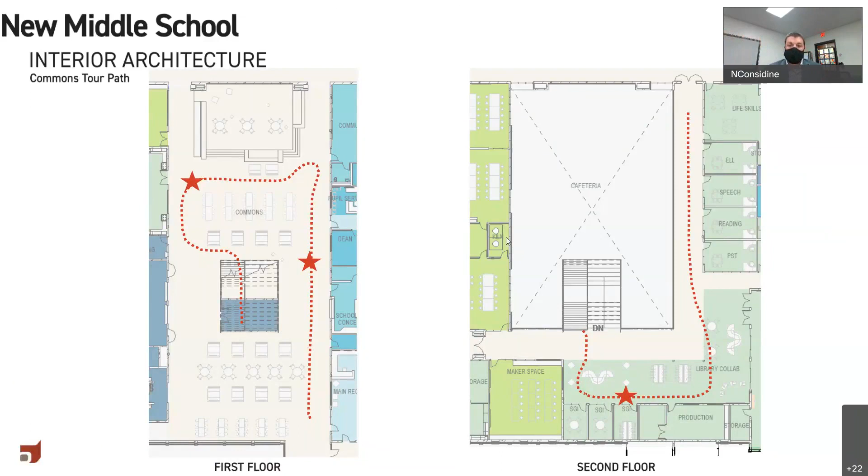So the first place we're looking at here is actually that raised platform we were just talking about. Again, identifying a place that will both enrich the cafeteria for everyday student use 90% of the time, but also provide an additional area for small, medium, and potentially larger performances. As Chris mentioned, our team is studying how many seats can fit in this commons for a potential performance or graduation ceremony. That's what we're currently working on.

But just speaking to the architecture here, we are starting to implement that idea of weaving in the ceiling and then highlighting that salvaged wood flooring as well.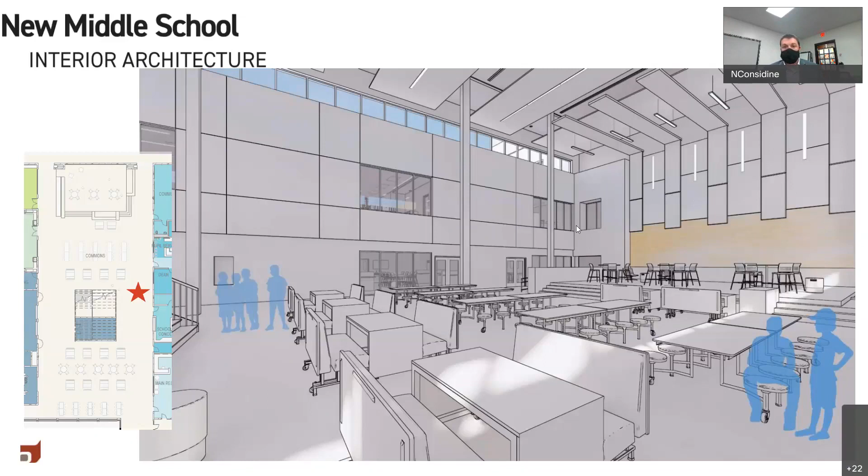Again, we're now looking in the opposite direction, so you're seeing that learning stair that really anchors this entire double height space. You can see the amount of natural daylight that comes in through the clerestory windows, and you can also start to see the transparency we're providing into a lot of the programs. We're really trying to connect all of the curriculum together and all of the students together.

So here you're starting to see the makerspace, and then our art and STEAM classes on the right, and special education office on the left. Again, that transparency really brings everything and everyone together.

This last image here is up on the second floor, part of what we've deemed the library collaboration space. So you're looking towards the east, towards Kentucky Street, through that large swath of glass at the library that we saw on the exterior. Again, trying to provide as many varied, enriching education spaces as we can that you don't currently have in the facility.

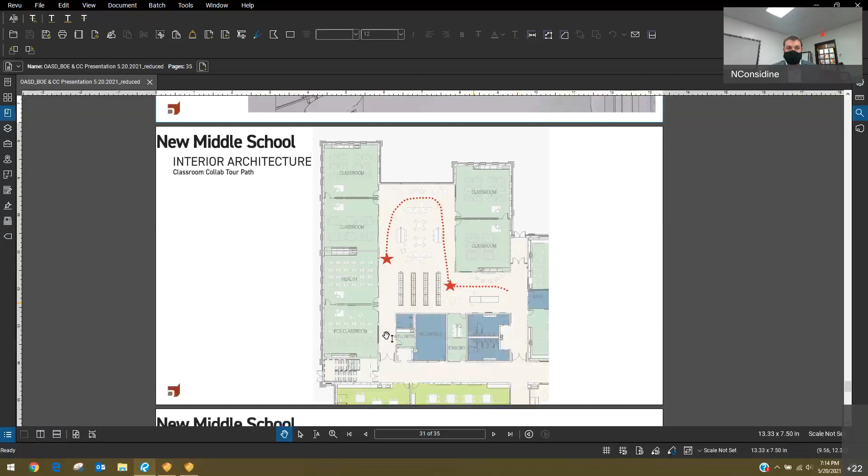So with that, we'll do a quick walkthrough. As I mentioned, these don't have the sort of finished quality yet, they don't have the materiality quite implemented. But again, it gives you a nice sense of how the architecture is starting to develop, how big things are. So here you can start to see that stage as we move forward.

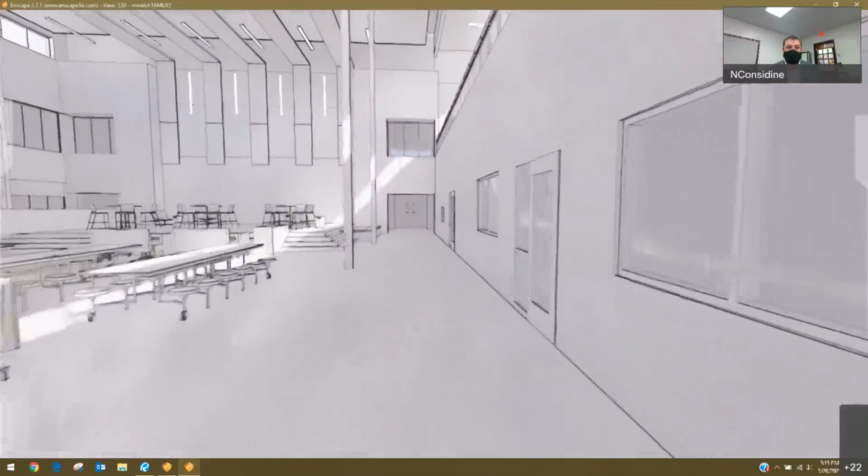Again, really putting those programs on display to celebrate them.

Have you guys seen this? Okay. Here's some stuff. You've seen it? Okay.

Sorry, keep going. If we just kind of pop our heads up to the glass here, you can start to see that FCS lab. So again, really highlighting each individual program.

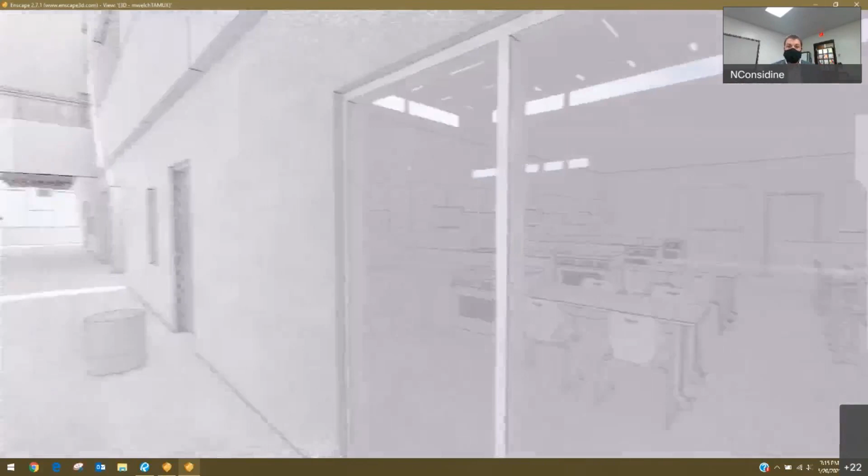Here we're going to come up the learning stair, and you'll notice that on the left these treads are a little bit taller. This allows for comfortable seating on these taller treads, so it's really an interactive stair where students can eat lunch on the stairs. It's really combining the first and second floor, stitching this entire building together.

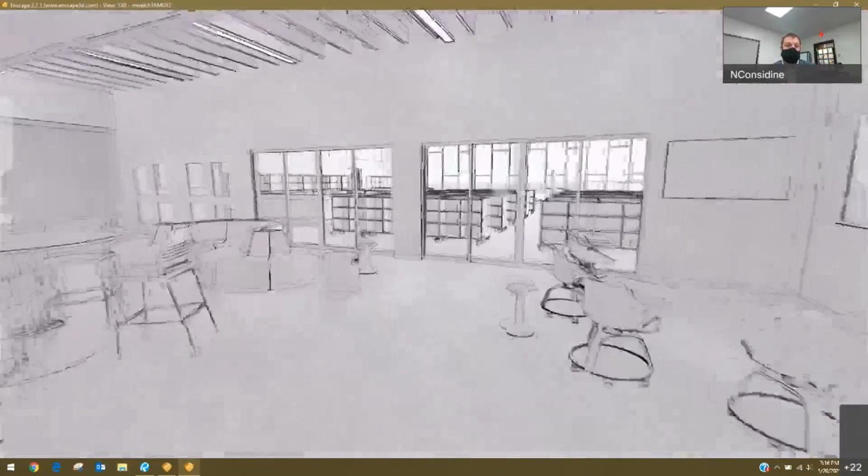This common space is hugely important. It really serves as the hub for the entire school, that connector point between the south portion of the building where the gym and music functions live, as well as the core academic areas on the north. Students will be passing through this space all day, every day. It'll also be a huge community asset as well, and something that we're very aware of.

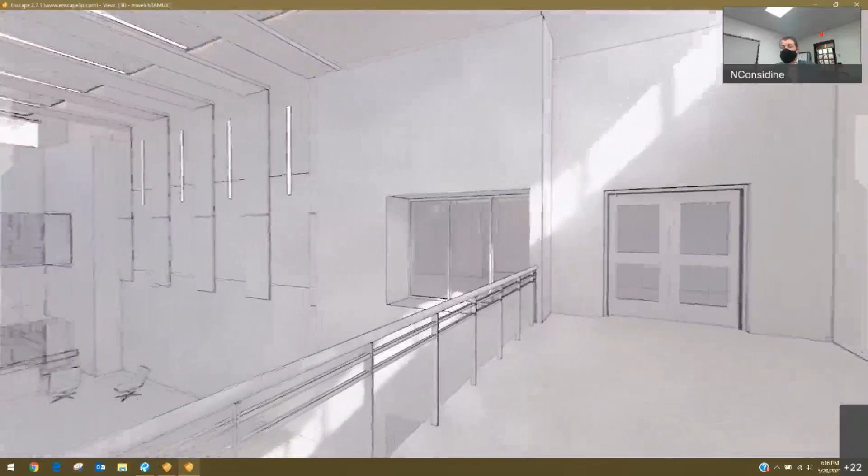When you bring this many students together in a big open space, acoustics become a concern, you'd think that space is going to be very loud. But we worked with acoustical engineers to make sure the space is designed properly so that although it's going to be a big space with a lot of natural light and air, it'll actually almost probably feel a little oddly quiet at times, given how large the space will be.

The last space we want to highlight today is the collaboration zones that I mentioned before. So this is a zoomed in plan of an academic house, with 2 stops on our tour here.

We thought it was really important to provide comfortable, varied learning environments. So you'll see flexible seating, soft seating, tabletop seating. You'll see small group instruction rooms for smaller groups to close the door and work on quieter tasks. But we're also looking to integrate built-in architectural elements for larger project areas, providing access to all of these spaces, as well as teacher collaboration opportunities, to offer as many environments as we can, as I keep saying.

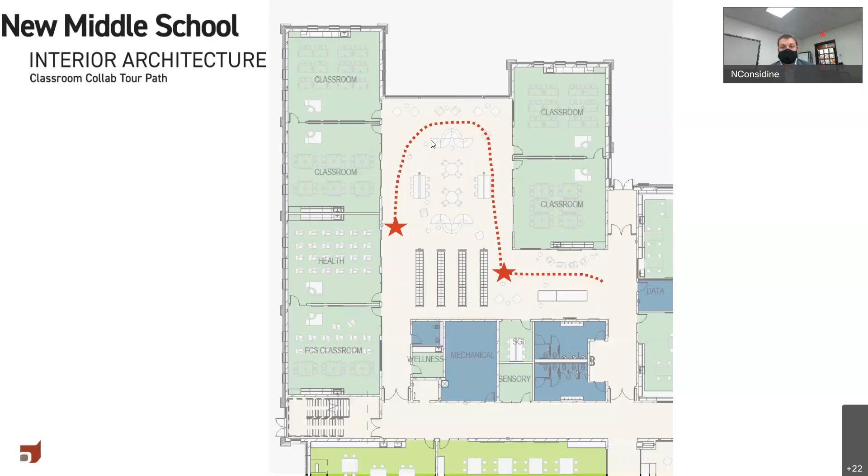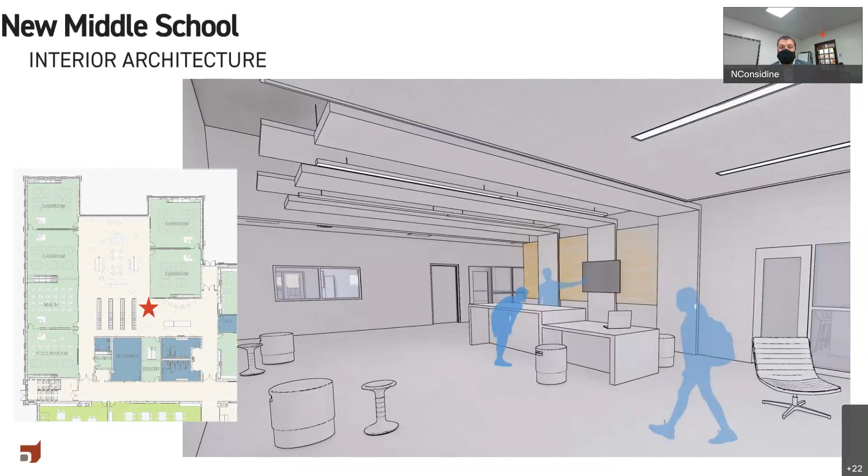So here the star indicates where we're standing again, looking towards the science classroom. Here's that built-in architectural piece that I mentioned. It's still very preliminary in how it actually functions, but again, we want to provide a space for students to roll out big projects, get their glue out, and do those sorts of things outside of the classroom.

And as you'll see, there's a lot of visibility. What we've been encouraging, as we've successfully done in other districts, is that a teacher should be able to say, you three or four go out into that area and work. The amount of glass, although we study and understand the safety side of it, also allows for multiple different learning environments. Studies have shown that a kid sitting in a classroom for 8 hours a day is not nearly as productive as when a student can get up, relocate, sit in a different chair, and move their environment throughout the day.

Before we move to the 3D walkthrough, I just want to highlight the ceiling elements. We're looking to design each grade level slightly differently, not only for the wayfinding component so students know where they are, but also for that identity piece, tying it all back to our guiding principle of unity.

So I'm going to zip down. Hopefully I don't make anyone car sick. Look away for a minute.

So here you can really start to imagine a threshold of security. To Nate's earlier point, we know that we need to compartmentalize the building in some way. So we're moving from something that is a little bit more public and accessible to the learning community itself. Again, on our right is the science area.

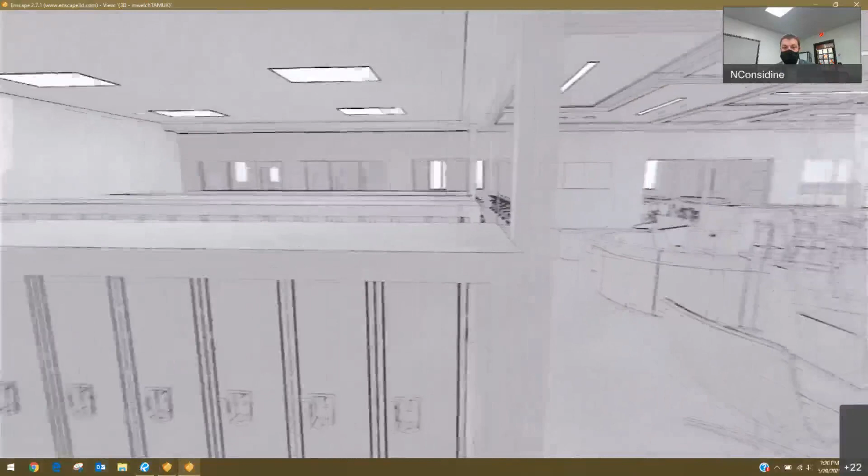And we're moving into the learning community now, passing by that tech bar, that project area I mentioned. We purposefully designed the locker bays to be consolidated into groups. We don't often recommend corridor-lined lockers anymore, and we're also recommending that these lockers be shorter. They're modeled at 4 feet right now, which allows an adult to easily see over and supervise the kids.

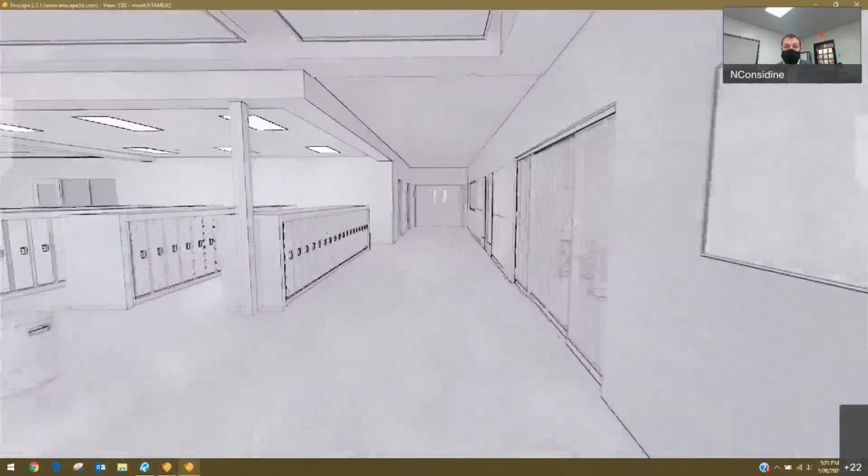And our interior designer will be working directly with district leadership as well as educators to make sure that we're providing and recommending the appropriate furniture solutions for this specific student population.

And with that, we know this was a lot to digest and you probably weren't expecting to see all of this today, but we're hoping that it does provide a little bit of context, generate a little bit of excitement, and a little bit of explanation for why some of the design decisions that we've made thus far were made, and how we're looking to move towards the future.

Any questions for what we showed you on the interior?

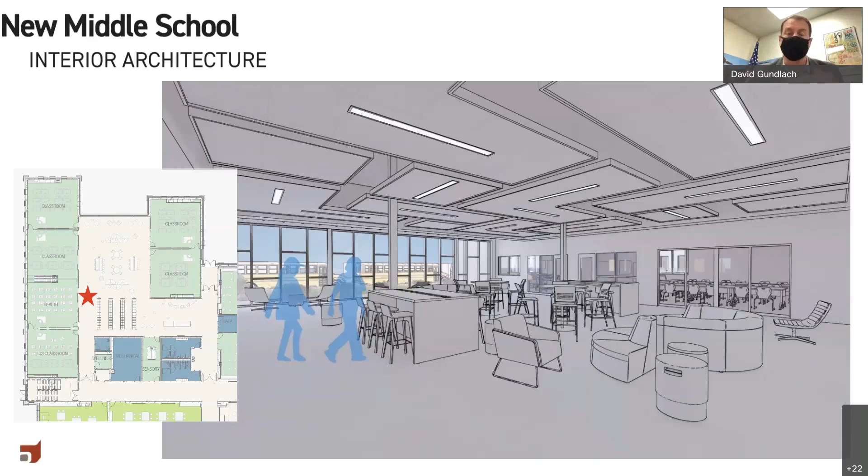The next piece is going to be presenting it to all the staff, not just the department heads in the various discipline areas, and that'll be on June 4th. Then there'll be an opportunity for people to see things if they have any questions, concerns, how certain things line up, et cetera, shortly thereafter. So that's sort of the tiered approach we're looking at taking. And we're looking at doing the same thing when we eventually, a year from now, are at the same point with the new elementary school.